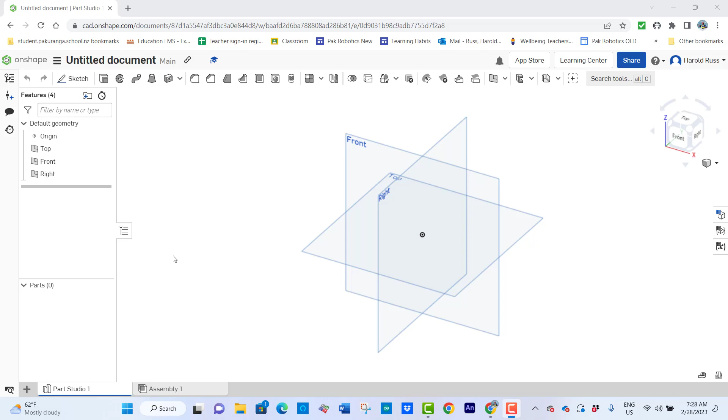This will show you how you can create a design based on components you choose to use. Open a new document, click on the Assembly tab and insert some components that you will need to have on your robot.

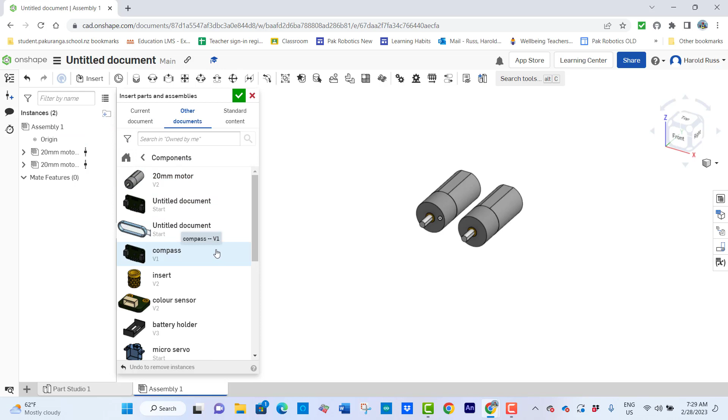Now you can start pushing the components around and try to organize them into a sensible arrangement. While you are doing this, you are thinking about several things. You don't want to make the robot too big. You want to keep the center of gravity low so the robot is stable.

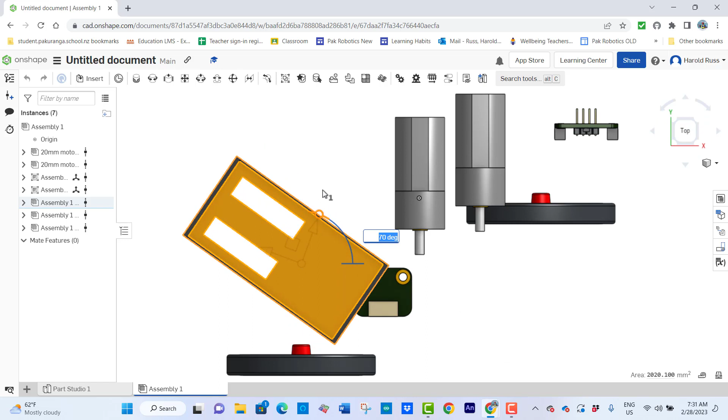If you are using a skid steering system with two wheels at the front and a skid at the back, then you don't want too much weight on the skid, or the robot will not turn easily. You know the robot has to climb a small hill, so you want to keep most of the weight over the wheels so that they get enough grip on the ground.

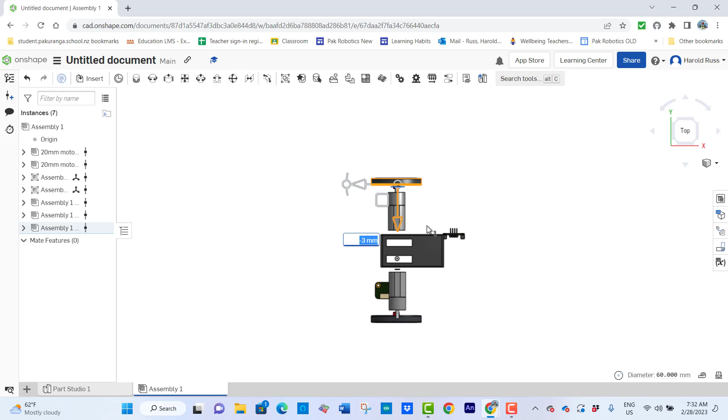If you are adding a color sensor, you know that the surface of the color sensor needs to be no more than 10 millimeters above the ground. If you are adding a compass, you know that it needs to be away from the motors and at least 100 millimeters above the ground because of the magnetic effects of steel beams in the tables.

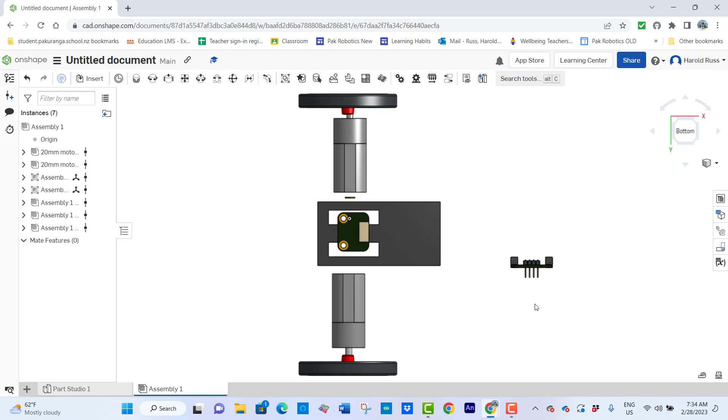Also, if you are adding a compass, you know that the X arrow printed on the compass needs to face the front of the robot, so that your compass readings show you the way the robot is pointing. So you move all the parts around until they are in positions that satisfy all of these conditions. There are quite a few ways you can do this, so you choose one which you think you will like.

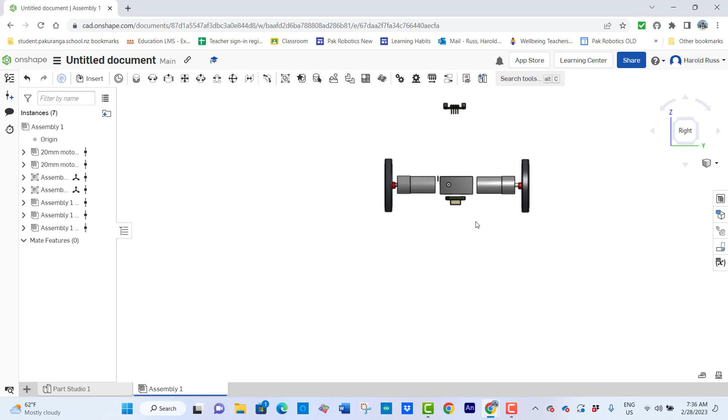Only after you have done all this do you start thinking about building a frame that will hold all these parts together.